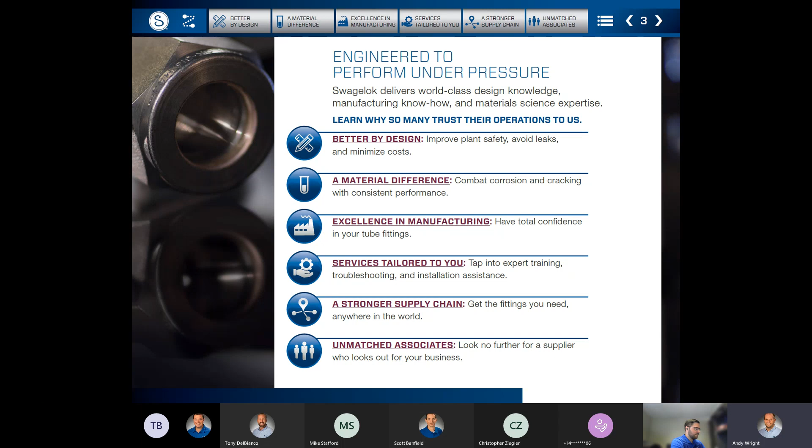I'll also touch at a high level on some of the other services that we offer, the supply chain that we employ, and then the unmatched associates that we employ, specifically the one that is presenting this webinar here today. So let me jump in.

So Swagelok is the pioneer of the original ferrule tube fitting, and that was developed in 1947, and we still have over 200 active patents worldwide. The culture of Swagelok manifests itself through our proprietary design of the tube fitting in the following ways. So we outperform other fittings in 3 key areas: tube grip, gas seal, and vibration resistance. We also deploy a SAT-12 carburization process on the back ferrule that is going to yield way better performance of the tube fitting.

Through the design, it is going to be easy to install. So the ease of installation is going to be important for the customers it uses. And then on the back end, we do a tremendous amount of rigorous testing in extreme environments to make sure that when they're out in the field, you can have peace of mind that they are going to be safe and reliable and leak tight every time. So above all, Swagelok's reputation is for reliability. And so, want to demonstrate some of that stuff today.

So Swagelok uses a grip type design. So it is not a bite type design. So there are some other designs out there that basically just bite onto the tubing as hard as they can, but that can lead to stress risers and premature cracking or fracturing of the tubing. So Swagelok has a different design, and it is a grip type design that utilizes a hinging and colleting action of the back ferrule to achieve optimal performance in three key areas. Those areas are going to be tube grip, gas seal, and vibration resistance.

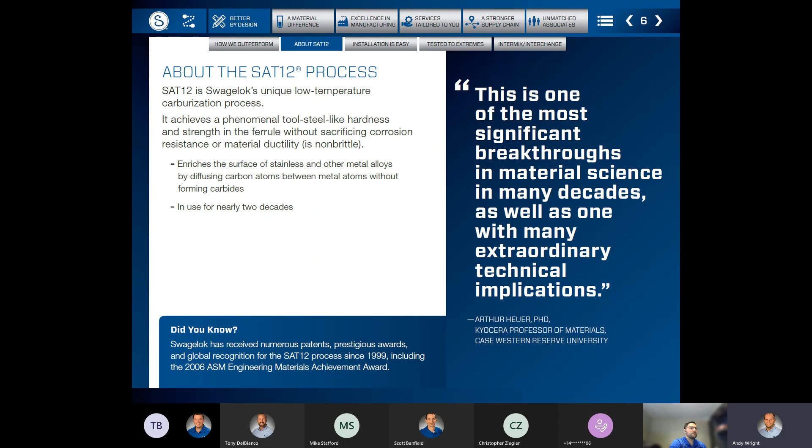So moving on to installation, I touched on it in a previous slide, but the installation procedure for a Swagelok tube fitting across multiple sizes, across different materials, is going to be 1 1/4 turns from finger tight. And the reason that it is 1 1/4 turns from finger tight is based upon the engineering principles of the ferrules that are inside of the tube fitting.

So this is not going to be based on torque. This is going to be based on distance that the nut needs to move in relation to the body, and that distance is 0.0625 inches. And so at that distance, that is going to get the front ferrule and the back ferrule to do their proper gas seal, tube grip, vibration resistance, and have a leak tight seal. So it's not based on torque, it's based on engineering.

And so on installation, only standard wrenches are needed. So there's no special tools that are required to make up a Swagelok tube fitting. There's no threading, flaring, soldering, brazing, or welding. And something that's important about the assembly is that Swagelok connections can be reassembled multiple times as well. So if you are using consistent installation practices, a Swagelok tube fitting can be used a number of times.

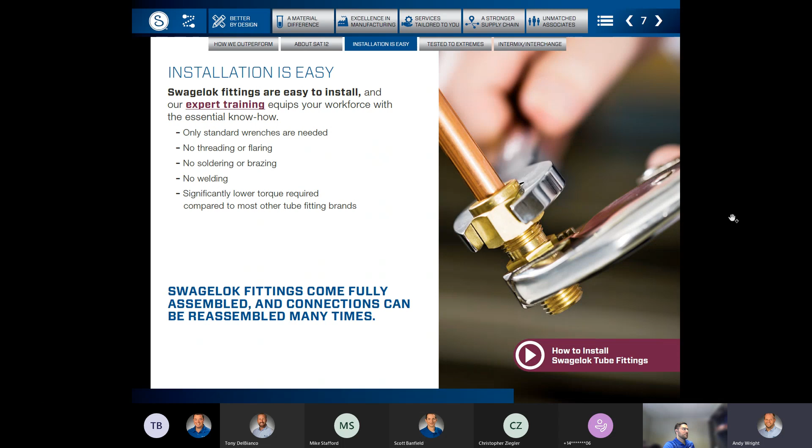So moving on from the installation, it's pretty apparent from some of these other areas that Swagelok is pretty scientific about the methods that they go through to design and metallurgy, and that's no different when it comes to testing on the back end. So Swagelok continuously and rigorously tests thousands of samples. So there are ongoing validation tests that are happening continuously.

And then Swagelok also publishes a comprehensive book of product test reports that are kind of more general in nature. But we can also do what we call customer test reports. So these are for specific conditions and specific applications unique to the customer. So if there's ever anything that you as a customer would be curious to run a test on, let us know and we can look into that.

And so before I move on to the raw material and the manufacturing, I just want to pause for a moment and mention Swagelok's stance on interchanging and intermixing. And the stance is never interchange and never intermix. The big reason for that is that there's no industry-wide commercial design standard for what constitutes a tube fitting. So that means that each manufacturer is going to follow its own standards and procedures. So each manufacturer is going to have its own design.

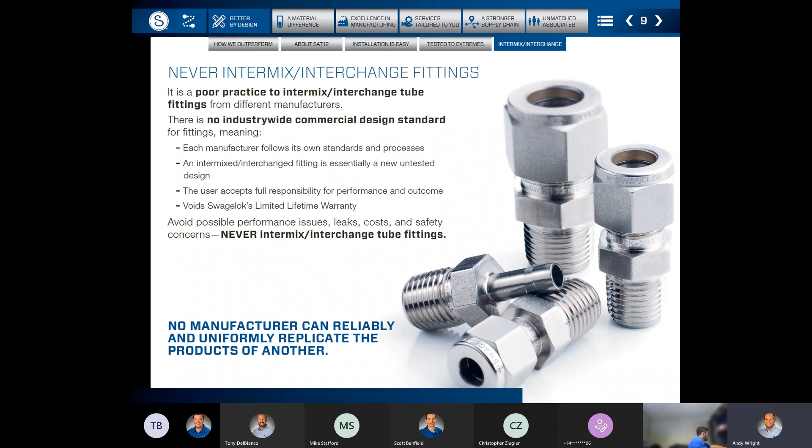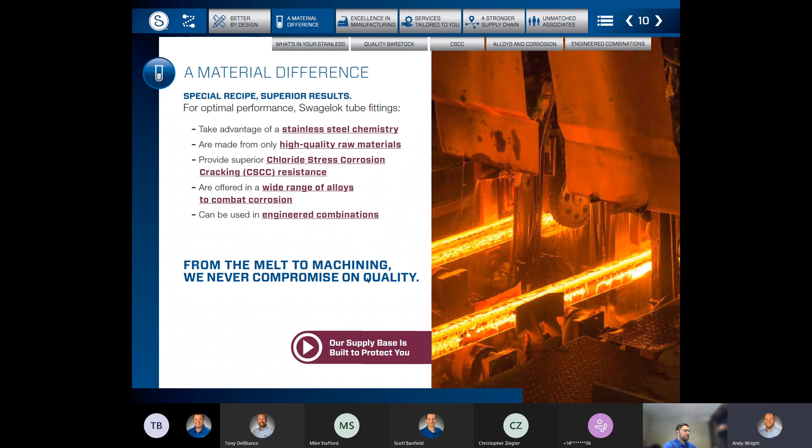So now, moving on to the raw material that Swagelok uses. You can have the best design, the best engineered product, but if you're not using top-of-the-line material to produce that, you can have subpar results. So at Swagelok, we like to say that everything starts with the melt.

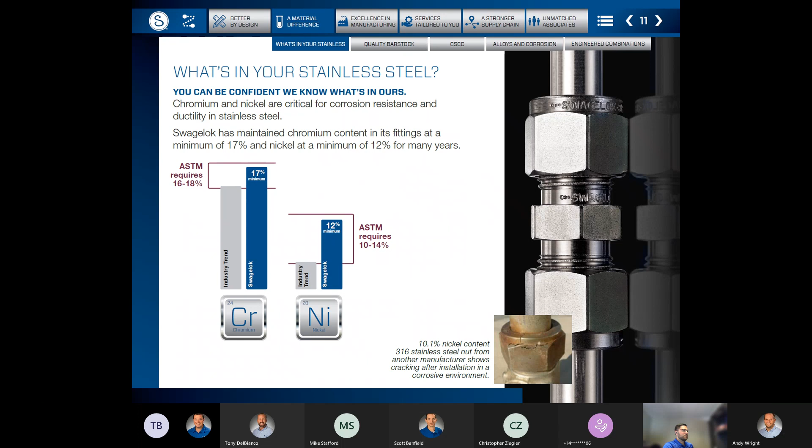As mills and stainless steel manufacturers have gotten better at dialing in the requirements of the elements that constitute stainless steel, they have tended to the lower ranges of the percentages for things like chromium and nickel. Swagelok, on the other hand, has maintained 17% chromium and 12% nickel. This is going to lead to enhanced corrosion resistance and ductility of the stainless steel. So again, this is another issue of not sacrificing quality for cost.

Swagelok is such a large buyer of stainless steels that we run batches from our approved mills that are unique to Swagelok. So Swagelok stainless steel cannot be purchased by anybody else. So when we go back to the intermix, there is no other company, no other manufacturer that is able to use the Swagelok stainless steel.

So we put a bunch of controls on our suppliers in the procurement process, and then we also undergo a tremendous amount of testing when it comes into our receiving. We do 100% ultrasonic testing. This just helps ensure uniform manufacturability when we're making our tube fittings.

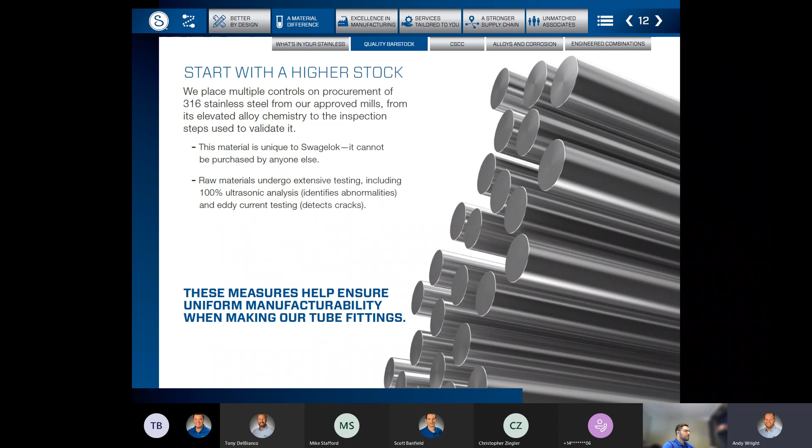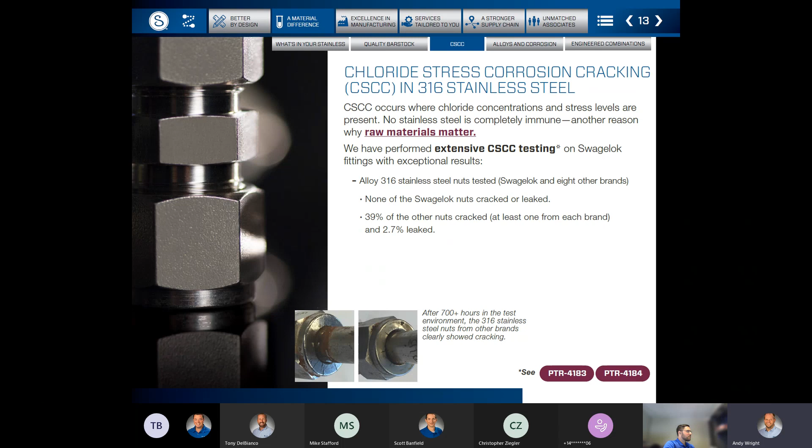This highlights some of the material and some of the testing. Chloride stress corrosion cracking happens. No stainless steel is immune from that, but through testing, none of the Swagelok nuts cracked or leaked, while 39% of other nuts cracked and 2.7% leaked. You can see the picture below of what 700-plus hours of a test environment does to other stainless steels.

With that in mind, Swagelok offers a wide array of alloys to combat corrosion, so just know that there are other options available. There are also engineered combinations of those alloys that we have tested and can employ to make sure that there is not a lot of corrosion cracking. Some of these are specific to seawater, but they can be applicable to other applications.

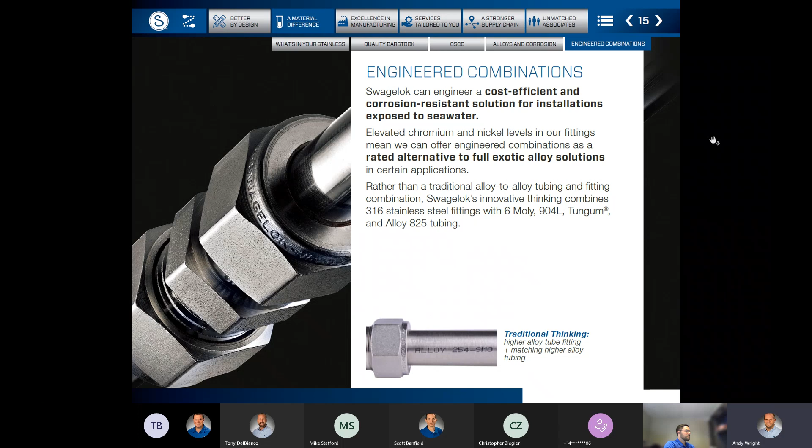Now, tying together some of the design and material into the manufacturing process. What's important here is that Swagelok owns the manufacturing process from start to finish. We forge, we machine, we electropolish, we weld, we assemble. We invest a lot into the machines that we use, always concerned about total cost of ownership of those machines, in order to minimize errors.

Swagelok also has a tool shop in the manufacturing center, so we maintain the tools there as well, which lets us achieve the super tight tolerances that we keep. We also have a robust reliability excellence program, which leads to traceability at all phases of the process. That enables us to stand behind our limited lifetime warranty.

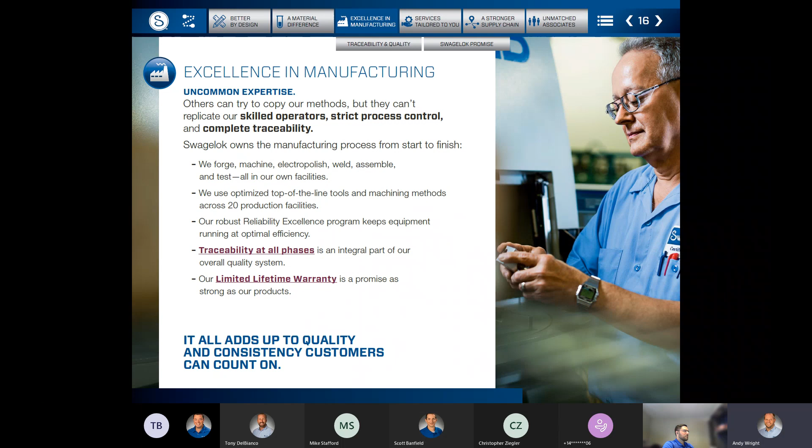Just know that a unique identification code is assigned to each heat of material, and this information is maintained throughout the manufacturing and assembly process. It allows us to track the material that makes up a part and which components are in an assembly. And we've been approved by all these quality systems listed here.

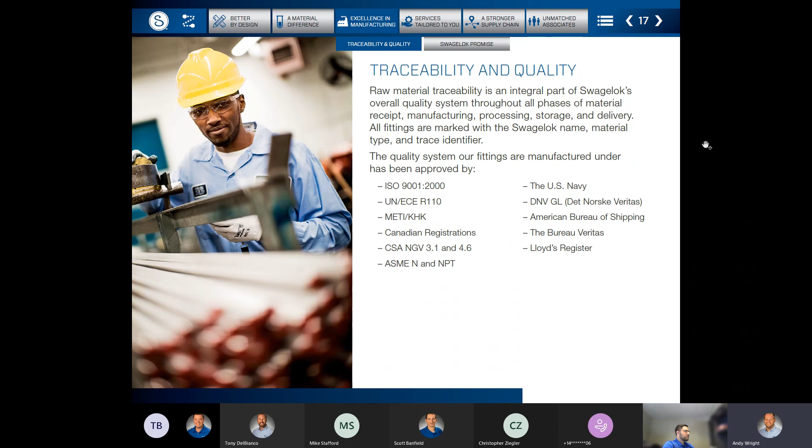Through all this, we are able to stand behind the Swagelok limited lifetime warranty, the best in the industry. We have been honoring the same warranty for over 70 years. If there's a defect of material or workmanship, we will replace not only the product but also its installation. I've personally been involved in a couple of product evaluations, and Swagelok does an excellent job of research and lab analysis to determine the root cause of a potential failure, to make sure the remedy is accurate.

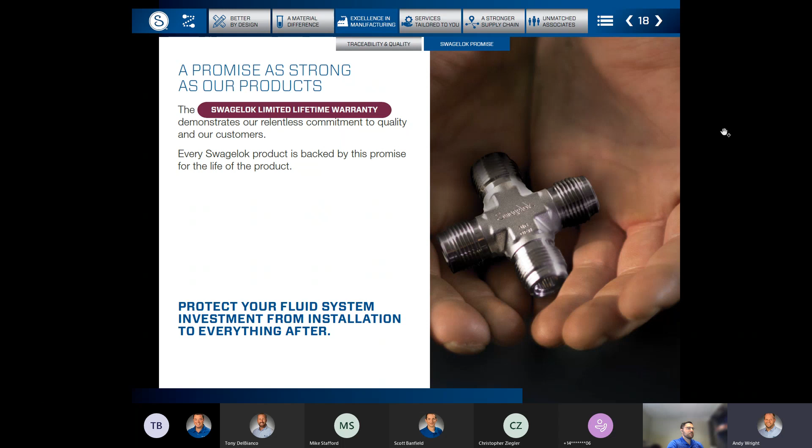So those are the topics that I wanted to cover: the design, the material, and the manufacturing. And in order to support these, I mentioned some of the training services that we offer, and everything has an eye towards safety with everything that we do. So we always want to make sure that we're producing, manufacturing, supporting safety, since tube fittings are a pressure containing device.

We also have other services that include on-site services, custom solutions, which is fabrication and assembly of components, and then obviously our technical know-how and expertise. And then, to get these products from the factory to our customers, we employ a pretty strong supply chain. So our business model is basically from the manufacturer to a handful of regional warehouses that are around the world. And then those regional warehouses supply 225 independently owned and operated sales and service centers.

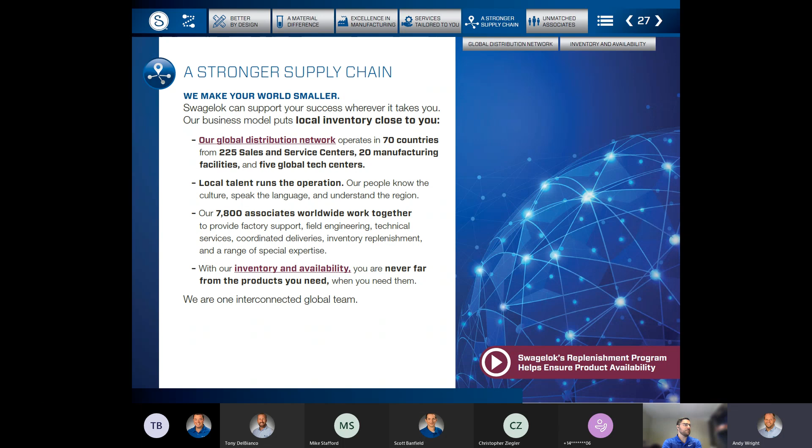And so we are one of those sales and service centers. And so, being local and knowing what our customers' wants and needs are is really important to understanding how we can best serve and service our customers. And then just a quick note on unmatched associates. So there is a lot of collaboration that goes along across the Swagelok network. We are constantly collaborating with the factory. So if we need technical support or something like a product evaluation, we have direct lines of communication to the factory. And then we also work a lot with our other sales and service centers to make sure the customers are receiving consistent support across their networks as well.